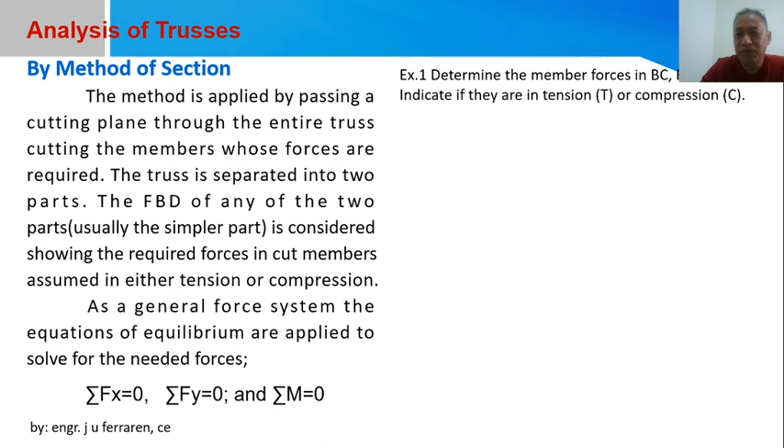You are asked to determine the member force, as indicated we have BC, FC, and FE. You are also asked to determine the nature of the force, whether it is tension, mark it as T, or compression, mark it as C.

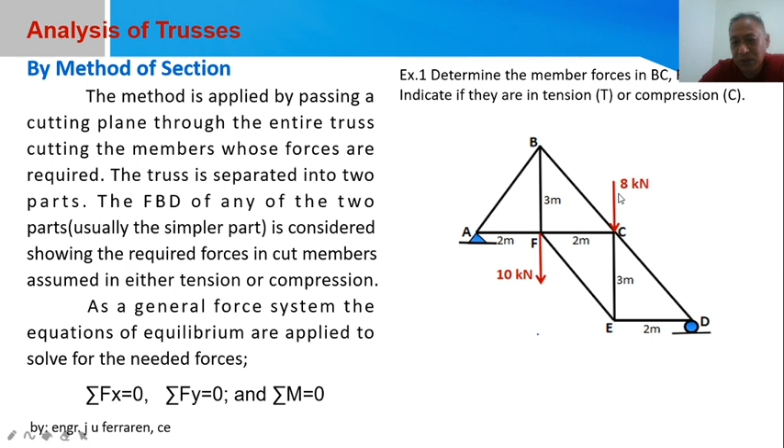Here is the given truss. The truss is loaded, we have external loads, and it is supported with a hinge and a roller. If you take note, our required member forces belong to BC, where is BC? This one, FC, and FE.

So you can easily determine where to put your cut section or your cutting plane. You can have your cutting plane here, and all three members can be cut by just one cutting plane. In the cut section, you have 3 unknowns, so that's enough because we also have 3 equations of equilibrium which can be used.

Now, if you consider either left or right, then it will include the reactive force. If right, you have the reaction at D. Not all the time are the reactions really necessary for us to determine, but under this case, if you consider the left of the section, you really need to solve for the reaction at A.

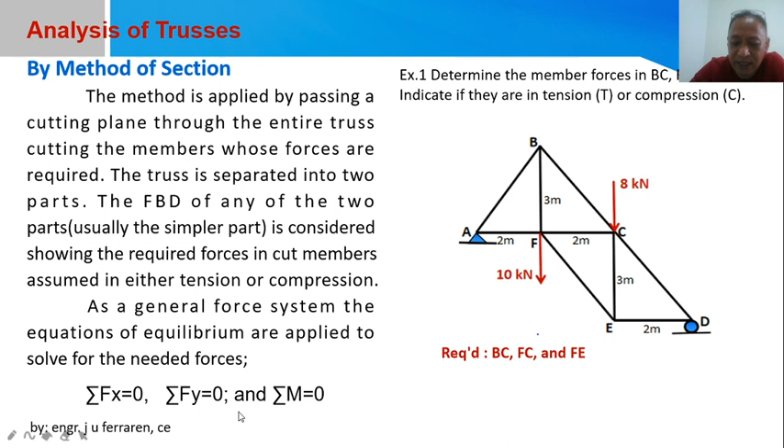So you have to consider the FBD of the entire truss. When you take the FBD of the entire truss, you may remove the support and replace it with the reactive forces, or just have the reactions placed at the support as shown.

Now solving, if I'm going to consider the left of the cutting plane, I can solve for the reactions at A, vertical and horizontal. By taking moment at D, you can have AV solved. But if you take moment at D, that will include AH, and AH is not known yet.

But if we inspect our given, AH is equal to 0, because if you take summation of forces horizontal, there are no other forces acting horizontally. So AH can be 0, and in your moment equation at D, you don't need to include AH.

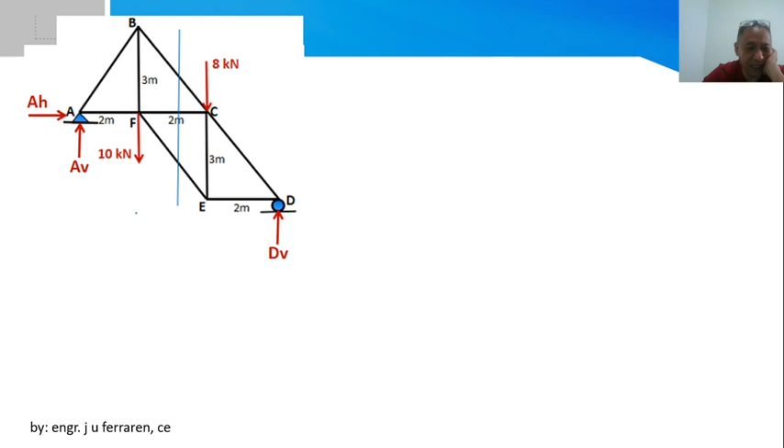So taking moment at D, you have AV times a distance of 6 meters, clockwise, and with respect to this, this will produce a counterclockwise rotation. That's why if this is plus, this is negative. 10 times 4, we have 8 times 2, equated to 0, I can solve for AV.

I prefer to use an exact value rather than a decimal value, because there may be some degree of error. So instead, I have to put the value in an exact form, to have accuracy in values which can be calculated later.

Now for purposes of checking, you may also choose to solve for DV. Taking moment at A, you can arrive with DV, which is 26 over 3. For purposes of checking, you just take their sum.

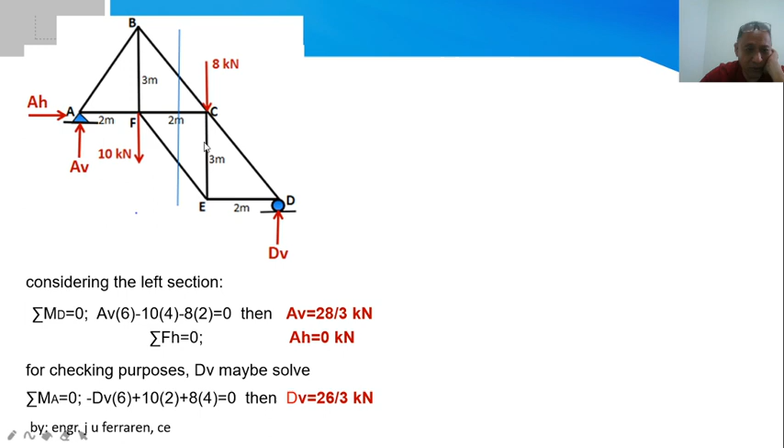These are all upward forces, then we have downward forces in our externally applied forces. So 28 over 3 plus 26 over 3, that's 54 over 3, the sum of which is actually 18, and this is also a downward force whose sum is equal to 18. So the two summations of forces, upward and downward, are actually equal to 0 if you take their sum, which means your reactive forces are correct.

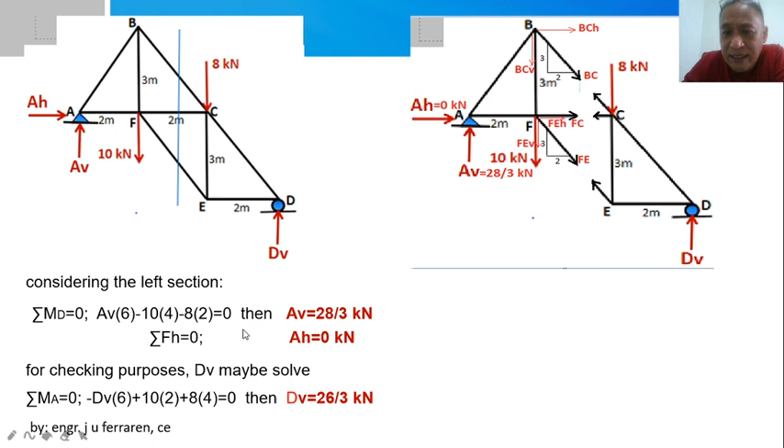Now I can proceed with the cut section. Using the cut section, I can diagram it. I can choose either left or right, so suppose I consider the left part, you can disregard the other half if you like. I'll just place everything, but it can also be an option to just show this part here.

So, I'll put it here because when we take moment summation, our moment center may be contained in the diagram itself, or it can be contained in the other section, not considered in the FBD.

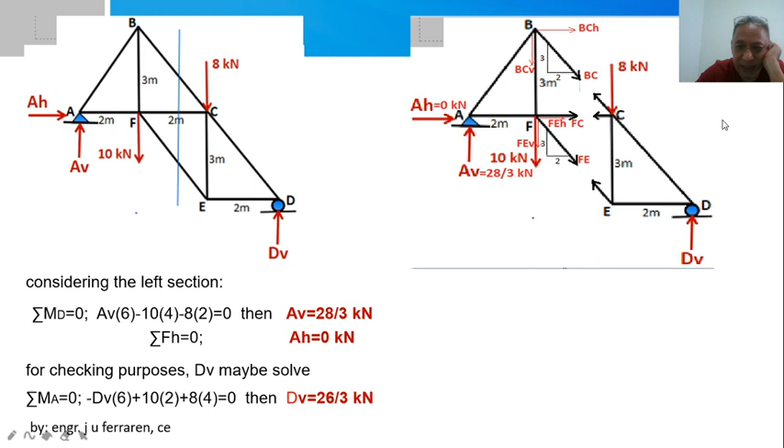So now, in solving for the required member force, it is good to look for a moment center in which the other forces which are not needed yet will commonly meet. If I'm interested in BC, it would be good if these two other forces will not appear in the equation, and that's possible if I use a moment center which is F.

So I can take moment summation with moment center F. Summation of moment at F: we have 28 over 3 times 2, clockwise. Then these forces will no longer appear because they pass through F. Only the horizontal component matters, since the vertical component of BC also passes through point F, so BC horizontal times a distance of 3, reducing BC to its horizontal component.

So we have 28 over 3 times 2 from the first term. For BC horizontal component, I use the horizontal side of my slope-defining triangle. The 3 and 2 come from this triangle. The hypotenuse is square root of 3 squared plus 2 squared, which is square root of 13. So 2 over square root of 13, then this is the moment arm.

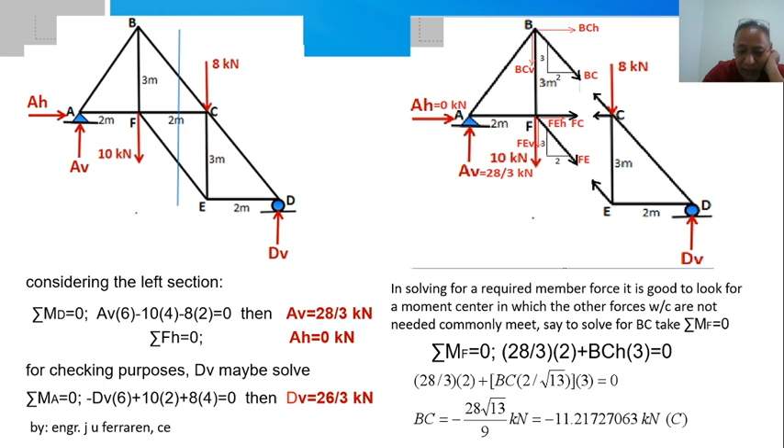Equal to zero, then you can evaluate BC. Your BC comes out negative. We assumed BC as tension, so it means the result is actually not tension, but compression.

Now, solving for the other member, if I take summation of moment at C, take note that BC and FC have a common node, that common joint these two forces pass through. So if you take moment at C, your equation will not involve this member force. What is left is only FE, so this is intended to solve for FE.

So, 28 over 3, what's the distance? 4. Minus 10, times a distance of 2. Then we have the FE term.

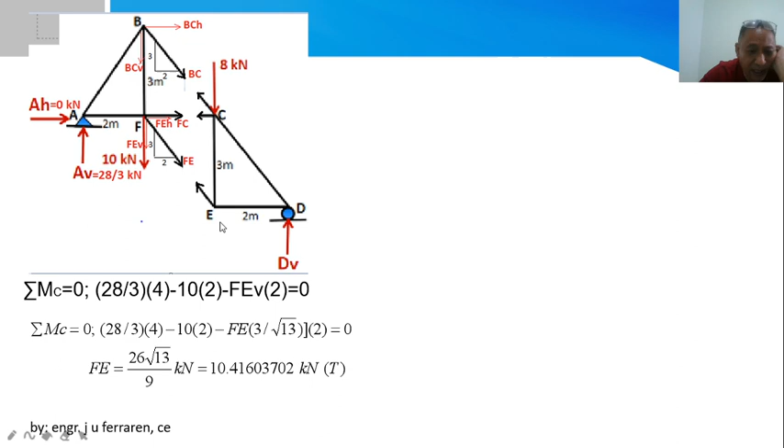FC also passes through C, so it's not included for that term; so we take the vertical component, multiplied with the distance 2. Then we have to reduce FE to its vertical component. We copy the term, reducing it: vertical side is 3, over square root of 13, distance is 2. Then you arrive at FE.

It's positive, meaning it is in tension. Now, in solving for the remaining force, since FC is horizontal, I can take summation of forces horizontal. If FC going right is plus, then BC horizontal going right also, and FE horizontal is also going right according to our diagram. However, our BC is in compression, so I just take the value evaluated earlier, which is negative.

So for summation of forces horizontal, I substitute the value for BC, reducing it to its horizontal component using the horizontal side of my triangle, 2 over square root of 13. Plus, combining with FE, which has value 26 square root of 13 over 9, using its horizontal side, 2 over square root of 13. When calculated, you arrive at 4 over 9 kilonewton, or 0.444 kilonewton, positive, meaning it is in tension.

And then you can collect your answer in your summary. So that is how to solve, analyzing a truss using the method of sections.

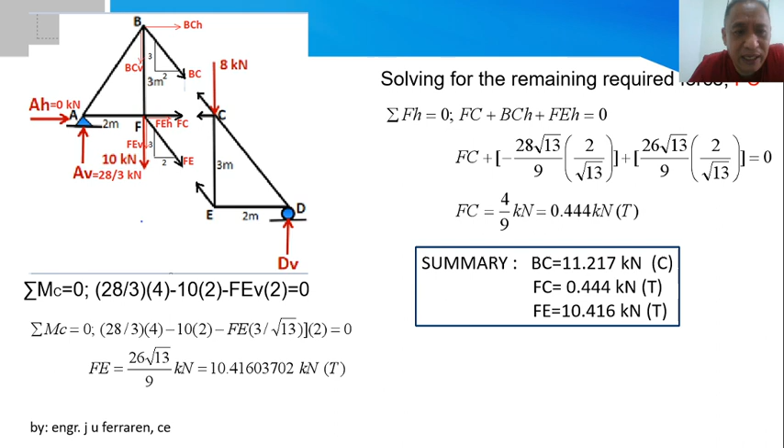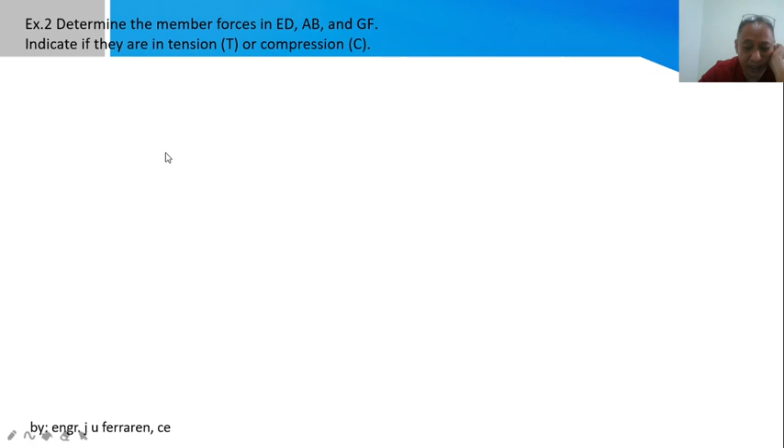Now, another example, I want to show where we don't really need the reaction. When you solve, do not immediately solve for the reaction because it will only cause delay when later it is not necessary. Here is a problem where you are required to get the member force ED, AB, and GF, indicating tension or compression as to the nature of the member force.

Look at the diagram, your ED is this one. So what method are you going to use, joint method or method of section? Actually, you could cut it either way. So do not consider the left side, that's more complicated, since it will involve the reaction. So in order to avoid using the reaction, I can solve for ED by just taking the joint method, because at joint D, you have only two unknown forces, so we can use the joint method.

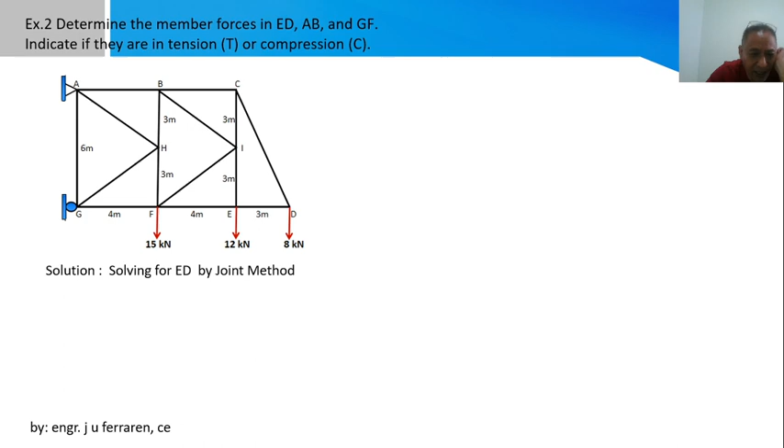Okay, solving for ED by joint method. Let's try, here is my diagram. These are the forces along the member CD and ED.

ED is needed, but I cannot go with ED without knowing CD. So I have to solve for CD by first taking the summation of forces vertical. Taking forces vertical, CD vertical up, plus, then minus at downward. So CD and its vertical component, vertical side, square root of 5 is the hypotenuse of this triangle.

Now, where did I get the 2 and 1? It might be that you are not able to follow the slope of the line of action of this force or this member. This is 6 and 3. If you divide 6 by 3, you arrive with 2 or 2 over 1. That is why, instead of using 6 and 3, I just reduce it to 2 and 1. That is why I have 2 and 1.

So, that is the reason why there is a slope of 2 is to 1. Simplifying, I can obtain a value for square root of 5, and in decimal value I have this. Summation of forces along the horizontal, all negative because that is going left. Minus ED minus CD horizontal, so ED is the one we need. So CD component horizontal, I have horizontal side 1 over square root of 5. If you simplify, ED is negative, so that is why the result of this is also a negative result. CD is substituted and we arrive at negative 4 kilonewton, ED is compression.

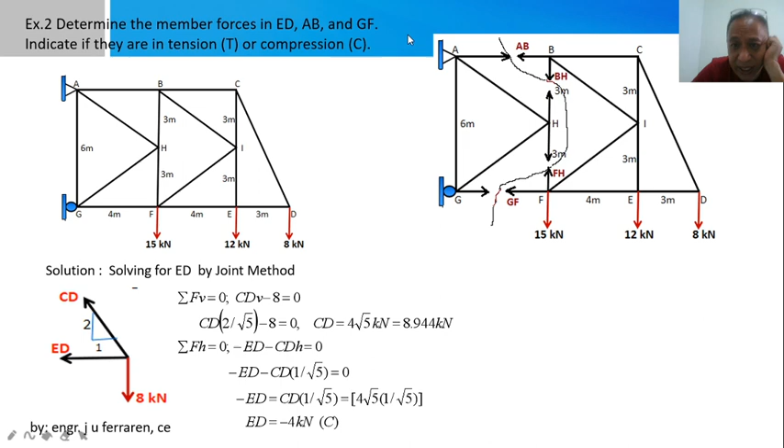So another option is to cut this way. How to cut? That way, you cut the member needed. But again, there is an advantage of having that. So you cut it this way. These are the cut members.

And then you have the option to use either the left or the right. Now I prefer to use the right part because if I'm going to use the left, then I need to solve for the reaction, so I will go to the right side. Now the advantage of cutting this way is that this part, or this member which is not part of the required, are forces whose line of action are the same and it will pass through these points.

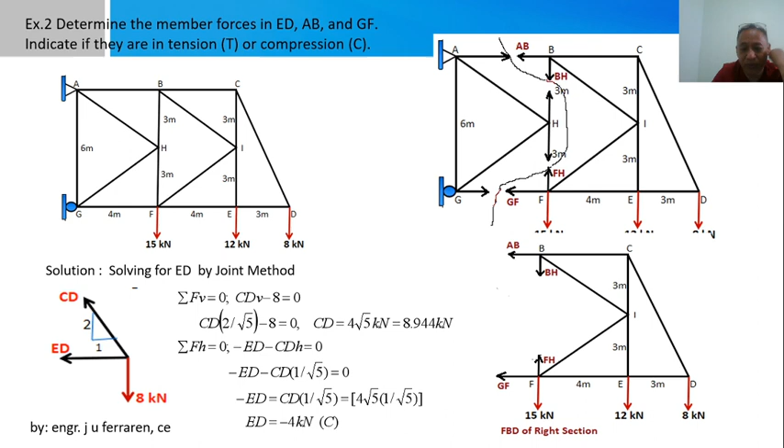That is why I choose to have that as my cut section. As a result, when you cut, it's good only to show that. So finding AB and GF using the right section. So these are the forces. As you notice, I did not use the reaction. You have to use the reaction if you consider the left.

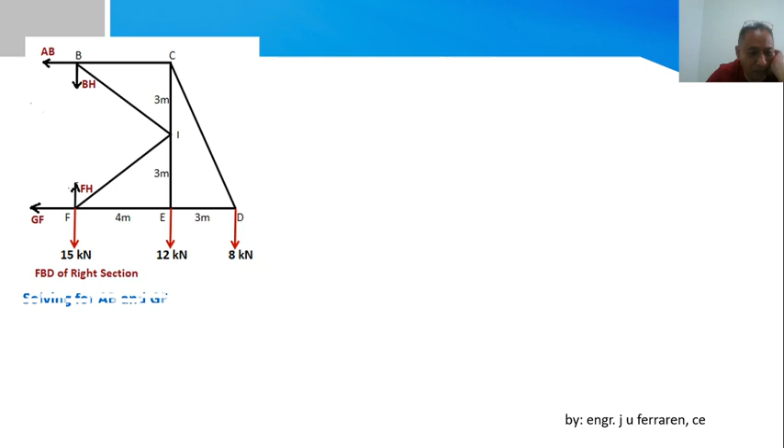So I have an option not to use it. I go directly with the right section of my cutting plane, solving for AB and GF. Summing up moments at F. So all these forces will be eliminated, because this passes through the same point. So what will appear in your equation? Nothing, so only the unknown AB remains.

AB with a distance of 6, counterclockwise. Then these two forces must be included: 12 times 4, 8 times 7, equated to 0. So AB is 52 over 3 in decimal value. That is the result.

Then in your summation of moment at B, GF will produce a clockwise rotation. These forces will again not produce any moment, including that one, using B as my moment center. So GF times 6, clockwise, and these two forces also will produce clockwise rotation: 12 times 4, 8 times 7, clockwise. So when you transpose, this becomes negative.

Actually, these two values are the same, equal in magnitude, opposite in direction. So it means these two actually were able to produce what we call a couple. But as to the value of the force, that's what you get. Okay, then you can now proceed with the summary of answers.

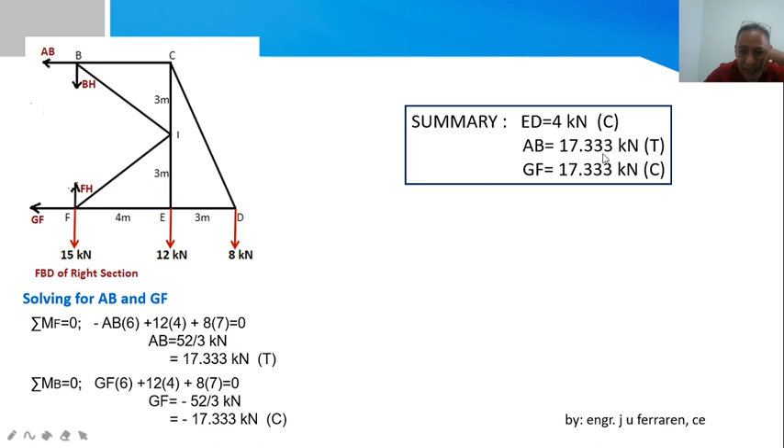ED is, so I can round up since this is no longer part of any computation. So in your summary, you can round up since it's not used to compute further. So ED is compression, AB is in tension, and GF is in compression.

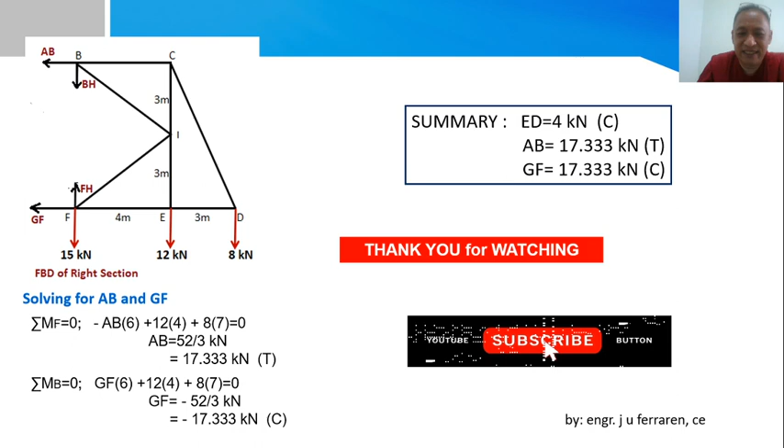Your GF is compressed, since it gets compressed there. Okay, so that's the last part. I hope everything is clear to you in the truss analysis. Thank you and goodbye.